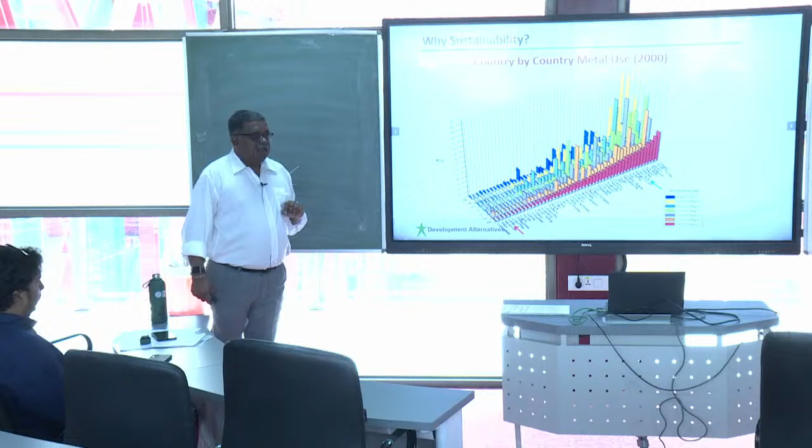Very interesting. This is the kind of development — does it mean that we don't need to develop? Yes, we need to, and we need to progress. The red mark here is where we are, India. And if you see Europe and the developed countries, they are all ahead in this kind of development.

This is the kind of metal use — I'm giving you just one idea on metal use. If we have to move from this place to that place, remember the amount of metal that we need to extract from the country, from the land. We cannot. So what the Chinese have done — I often travel to Africa quite a bit — is they are now buying up huge amounts.

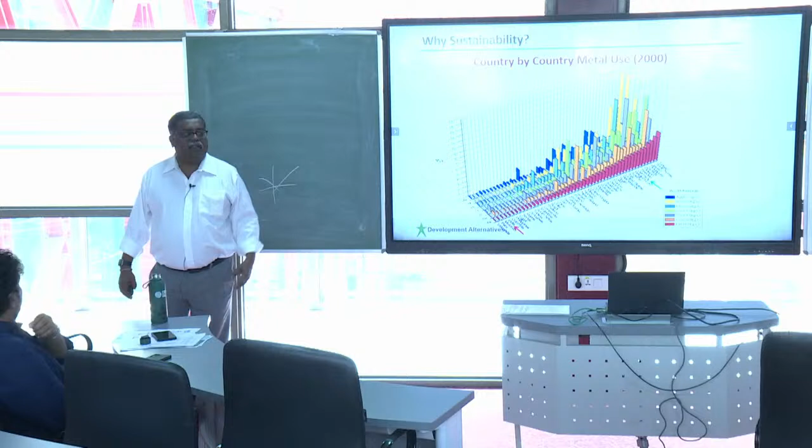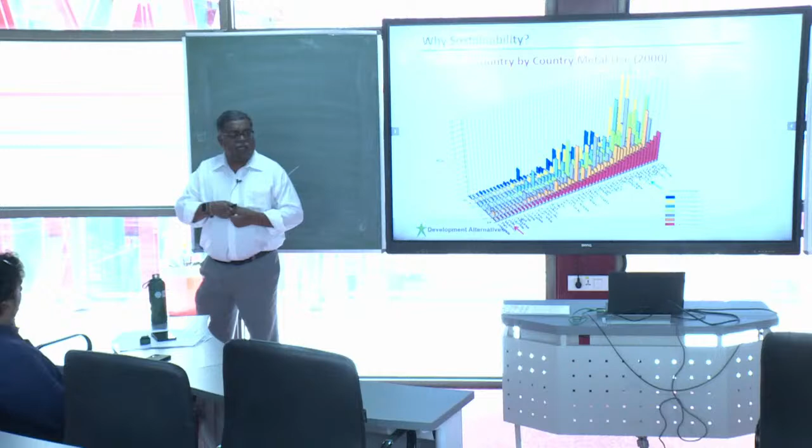You know why the Chinese are investing in African countries? They are giving grants, they are giving loans, and when the countries are not able to pay, they are saying give us the land, give us the mines. So they are securing mines for the next 100 years. We are also doing it — India now is securing mines in Africa, in Indonesia, in Australia, and in various other areas just to buy.

We have to use our own mines. Is it possible? Do we have that? Oil has peaked, and within the next 20 years, these resources are also going to be depleted.

We did a small study, but that study was never published. It was in Bangladesh. I can share with you the gist of that study. It was done by the World Bank to see what is the effect of use of topsoil in brickmaking. You have seen brickmaking here — we use the topsoil. Bangladesh has roughly more than 7,000 brick kilns, and they always use the topsoil.

They are a country where 80% of their land is cultivated. They don't have any more land. 20% is houses, rivers, ponds and other things — you cannot do anything on the river. So 80% is cultivated, and in that 80%, at any given time you can do 3 crops. Out of that 80%, around 50 to 60% they have already done, and are already doing, 3 crops. So you can increase it by only another couple of percentage points.

With the kind of population growth going up and the kind of soil going into brickmaking, we had predicted that in the next 25 years the country would go into famine, or they would have to over-depend on importing food materials — and that is happening now. That is going to result in civil unrest. The World Bank never published this because it was seen as an anti-government kind of report. They said they cannot publish it, but that is the kind of thing that is going on, and it is soon going to come to a head.

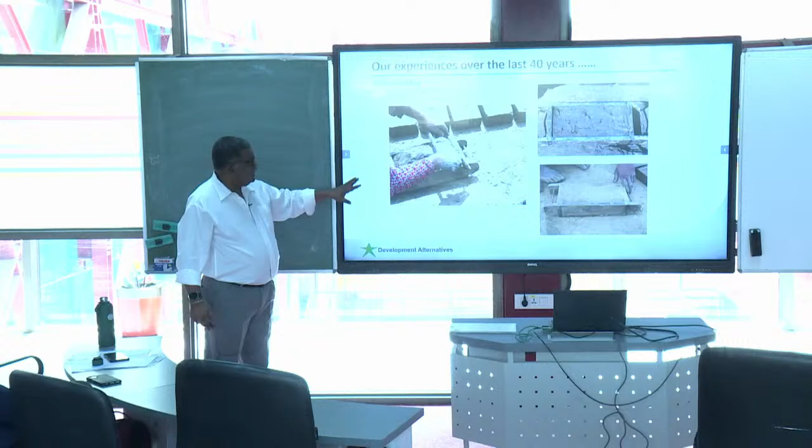So we are now trying to introduce brick making activities, but this is also a picture of Nepal. These are the kind of bricks being made with new kind of technologies and chemistry. These are the kind of things that can now happen, and very, very small, it doesn't need very difficult science to do this.

But if somebody has the urge to change it, it is about using your own IQ. It is about going to the field, seeing it, observing it, talking to people. In certain cases, the people working in the field are more knowledgeable than us. The only thing is they can't express their knowledge in the scientific terms that we understand. But all of these things that you see, half of them have been learned by interacting with people who don't know how to read and write. But the traditional knowledge that they have is immense.

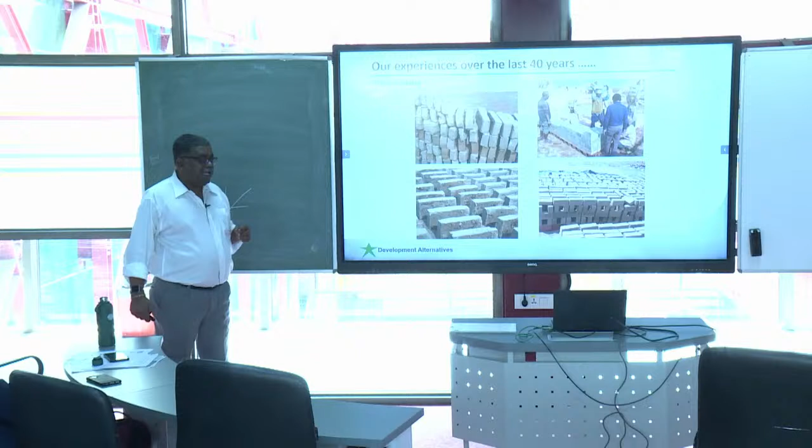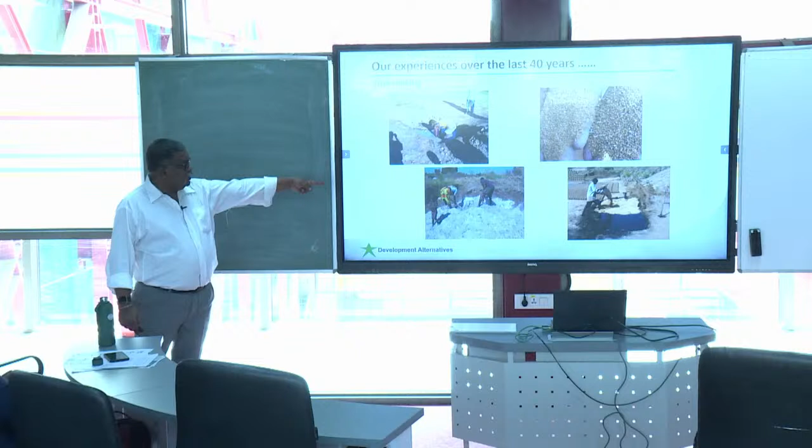This is again using bricks to reduce coal consumption and fuel consumption, using waste materials like waste fly ash, waste straw, any kind of organic waste.

And I showed you the African slide where that kind of wood is being used. This is the kiln that we developed in Africa. You cannot see, and this is running, you cannot see any smoke coming out, just some amount of moisture, white, little. This has been counted as the world's most energy efficient kiln.

Nobody knows about it much. We have not been promoting this. But in Africa, I would not say in Asia, but in Africa, they are still 50 years behind us. But the social, geographical, and cultural conditions are more or less the same as in India. They can relate to us, we can relate to them.

So the kind of opportunities there are in taking Indian technologies there is absolutely immense. I've never seen more neem trees than in Africa, especially in Kenya, more than in India.

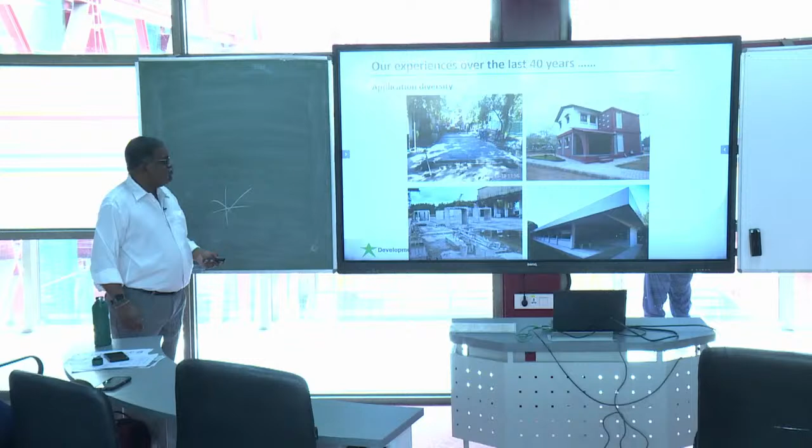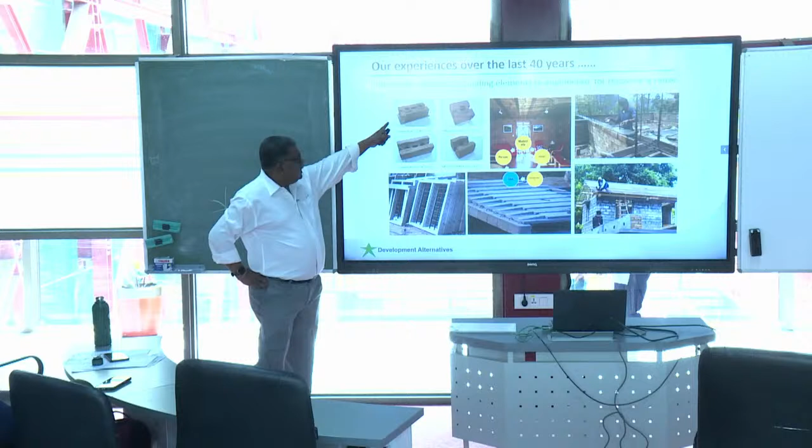Various types of building materials which can be re-engineered. You have never seen these bricks, but these are very important building materials, especially for hilly areas like Himachal, Uttarakhand, and other areas.

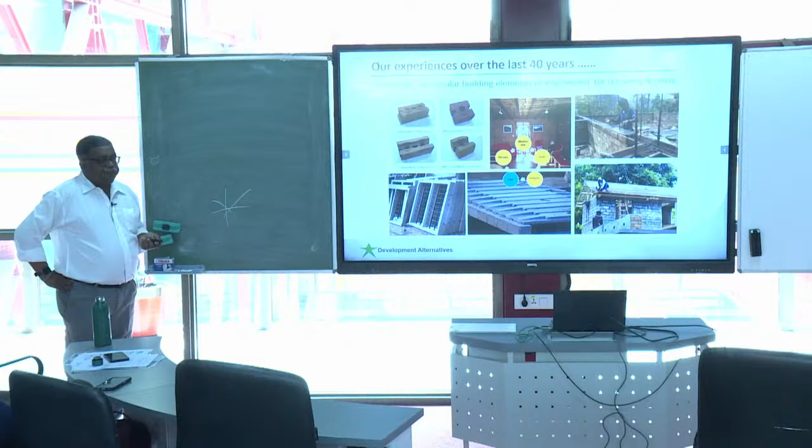We had been working, you have heard his name, in Ladakh, in Leh, on making brick with straw. Leh is a place that will not be applicable here, it's a desert where you don't have rainfall. The temperature in the summer months is 15 or 20 degrees, but in the winter it is minus 20, minus 30, minus 40.

With that fiber-based brick, compressed, you can use a little bit of clay. If you can make good buildings with proper design, even at minus 30 degree temperature outside, the inside temperature stays close and comfortable. So these are some of the different types of building materials available all around the country, and we have been working towards it.

This is again all materials. This is the house in Uttarakhand, in Chamba, with all materials produced locally, using small enterprises. The only thing that they need is technical support.

Don't worry about money, they have all the money. The only guidance they need is because they have been traditionally building with red bricks, and red bricks are not environmental. So you have to give them knowledge on what they can build, keeping the traditional structure the same. You cannot destroy this traditional structure. And of course, last couple of slides, this was our headquarters building.

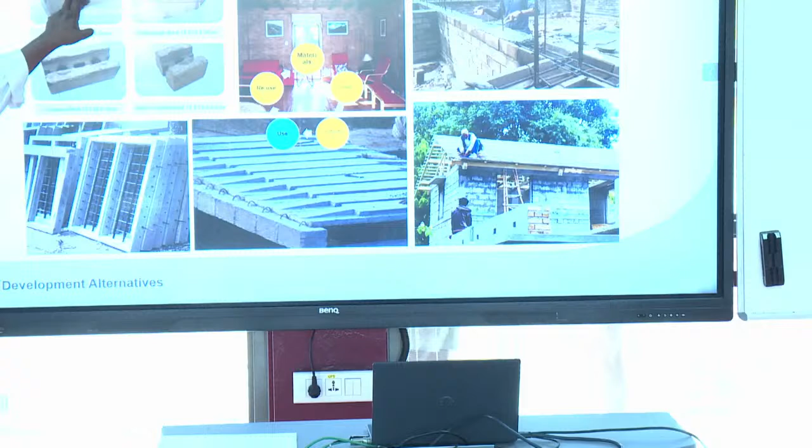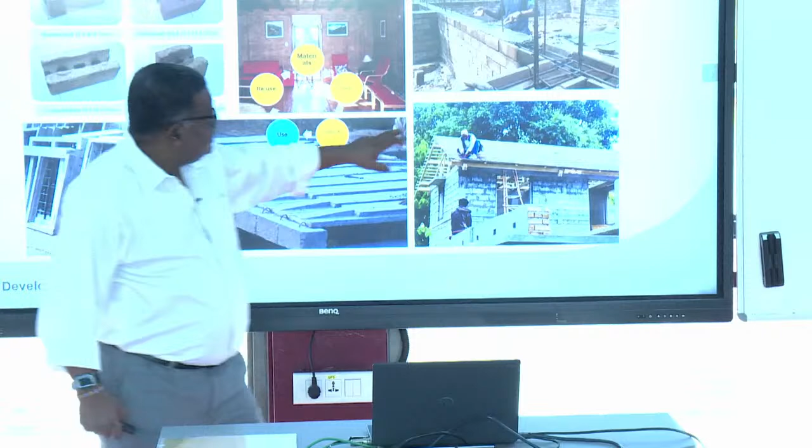So, let me go back—the materials themselves are not what make something disaster resistant, but the construction process is. If you see these bricks, these are two different things. Previously in Nepal, these were very old constructions, mainly made with bricks without any concrete columns or pillars—1 story, because in hilly areas you don't construct 5 or 10 story buildings, just 1 or 2 stories. These were all load-bearing structures, so when the earthquake hit, everything fell. Right now, what we are doing is using steel—we had very little steel initially—thinking we need to make disaster resistant houses.